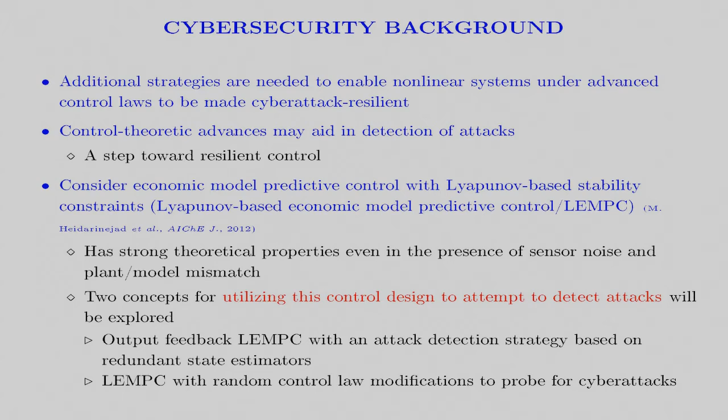We consider a class of input affine nonlinear systems with bounded disturbances and bounded inputs. We consider that the origin of this system is stabilizable, in the sense that there exists an explicit stabilizing control law, h(x), that can render the origin of the system in the absence of disturbances asymptotically stable, in the sense that there exists a Lyapunov function V for which the time derivative along the closed-loop state trajectories under the controller h(x) is negative, for all x in a neighborhood D of the origin. We define a level set of the Lyapunov function in D as the stability region, Omega rho.

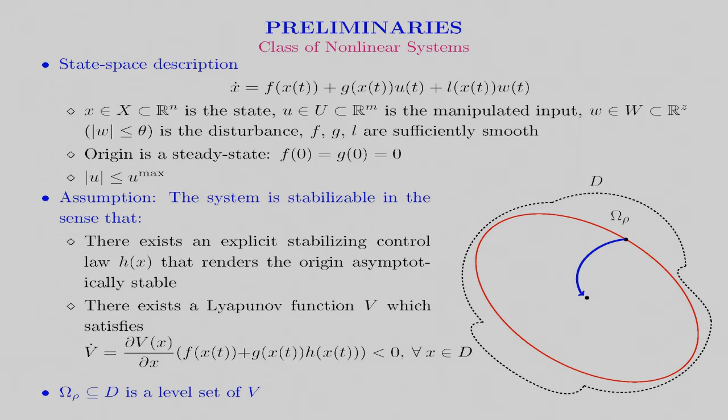We also consider that there are m sets of outputs that are continuously available, and we allow for bounded measurement noise. We assume the existence of a deterministic observer for each of the m sets of measurements, which can be utilized to stabilize the closed-loop state within Omega rho when used for providing state estimates to the controller h(x), and for which the estimation error can be bounded after a time t_bi.

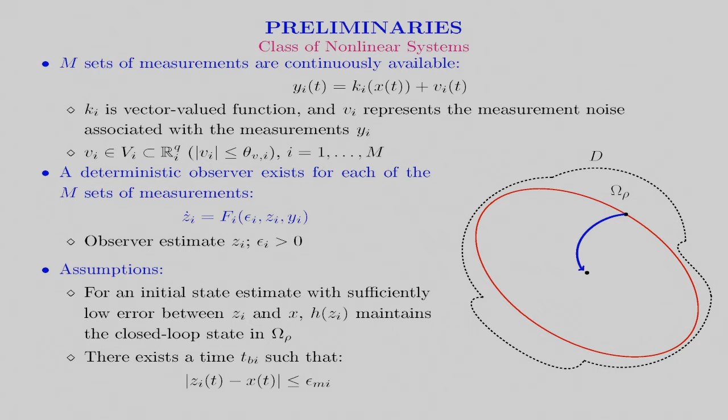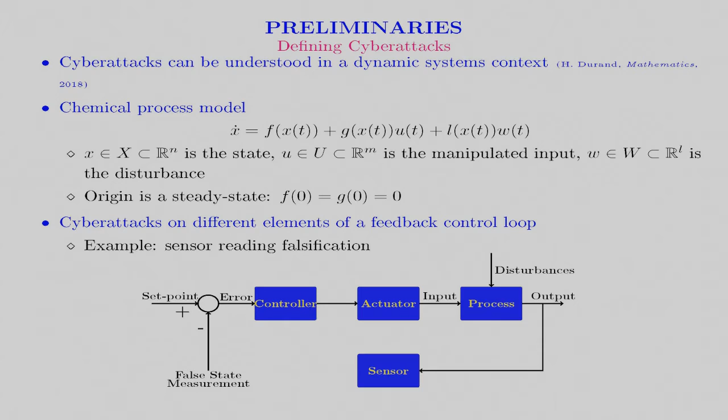Now that we have defined our class of systems, we can use it in defining cyber attacks. Cyber attacks can be understood in a dynamic systems context and can be performed on different elements of a feedback control loop. For example, an attack could break the feedback loop by providing false state measurements to a controller instead of sensor readings. This is the type of attack we will focus on in this talk. False sensor reading cyber attacks prevent true process knowledge from being obtained by the controller. However, it has previously been suggested in the literature that state estimation may help with reconstructing falsified states and detecting attacks.

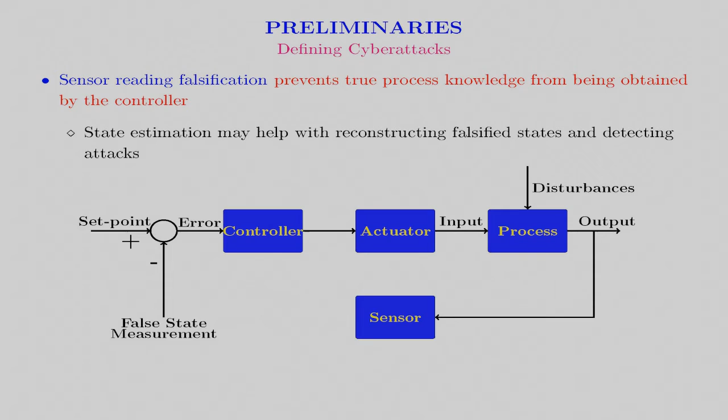A general formulation for output feedback economic model predictive control is shown here. Economic model predictive control, or EMPC, is an optimization-based controller, so it computes control actions by solving an optimization problem, minimizing the time integral of a general and potentially economics-based stage cost L_e, subject to a process dynamic model, state estimate, and input and state constraints. An output feedback EMPC formulation, which our proposed method for cyber attack detection builds on, has been developed with theoretical guarantees in the presence of bounded estimation error and with additional constraints.

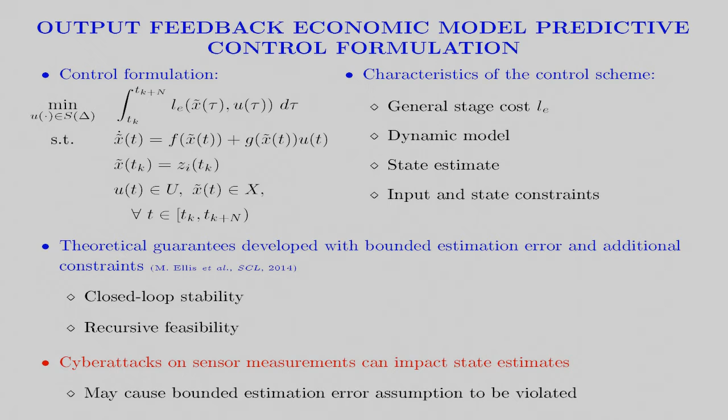However, the bounded estimation error assumption could be disrupted by a cyber attack, so attacks must be detected to prevent closed-loop stability issues. The output feedback EMPC formulation, which our work will build on, is shown here. As noted on the prior slide, this formulation has additional constraints beyond those shown on the prior slide.

These additional constraints are Lyapunov-based stability constraints, and there are two sets of such constraints. The first, shown here in red, are the Mode 1 constraints and correspond to allowing the state predictions in the LEMPC to vary throughout omega rho e,1 while guaranteeing that the closed-loop state stays in omega rho. The stabilizing controller h of x is used in the constraint design and is a feasible solution in sample and hold at every sampling time.

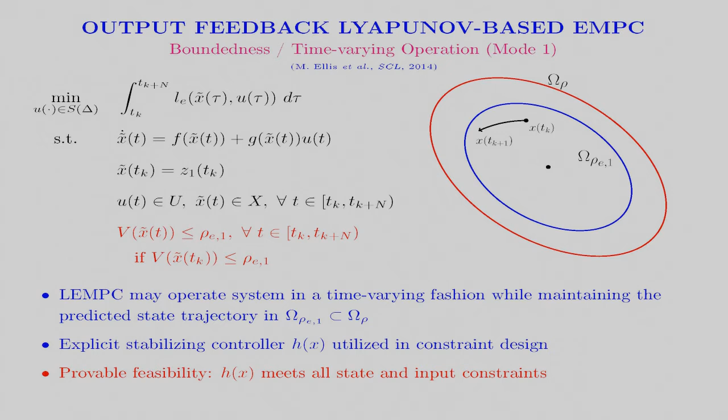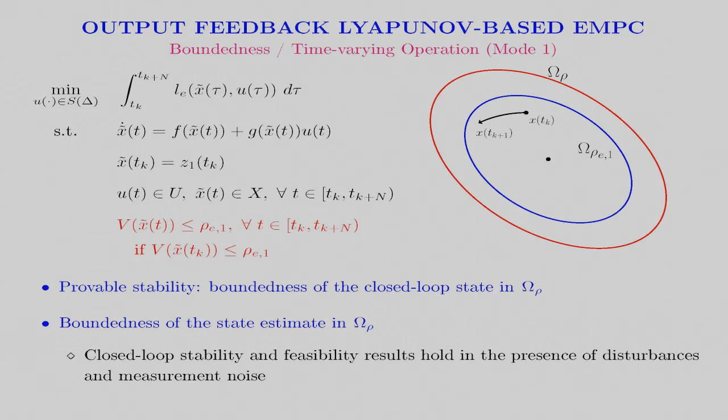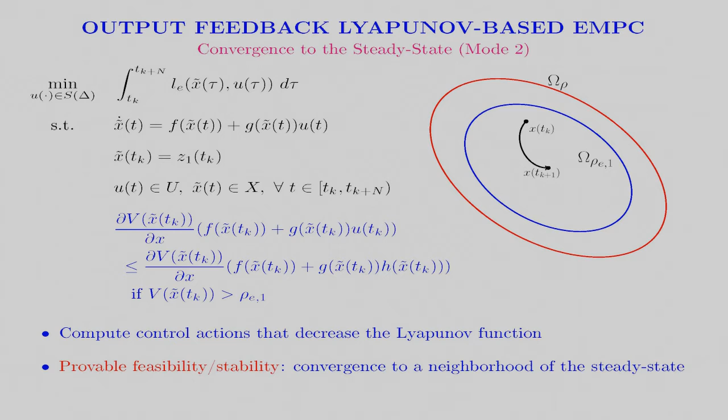This Mode 1 formulation of LEMPC with state estimation-based feedback can keep the closed-loop state and state estimates in omega rho in the presence of bounded disturbances and measurement noise. The second constraint of LEMPC, or the Mode 2 constraint, is shown on this slide in blue. It is a contractive constraint that ensures that the computed control actions decrease the value of the Lyapunov function over the next sampling period. If applied consistently, this constraint could drive the state to a neighborhood of the steady state. This completes the background on LEMPC with output feedback.

Now, we look at how such a control design might be used in cyberattack detection and resilient control. This is the first of the two cyberattack detection concepts to be presented in this work, and is motivated by the fact that the stability results of the prior section rely on the state measurements behaving according to the expected noise profile. If a cyberattack on the measurements occurs, it may not satisfy the expected conditions and has potential to impact closed-loop stability.

However, the properties assumed for the state estimators suggest that redundant estimators could aid in attack detection. Specifically, given the assumption that the state estimate and actual state eventually come within a bound for each estimator, a maximum difference between the estimates from any two estimators can be derived for the case that no attack occurs. This difference can be checked at every sampling time to attempt to flag falsified sensor measurements if it does not hold.

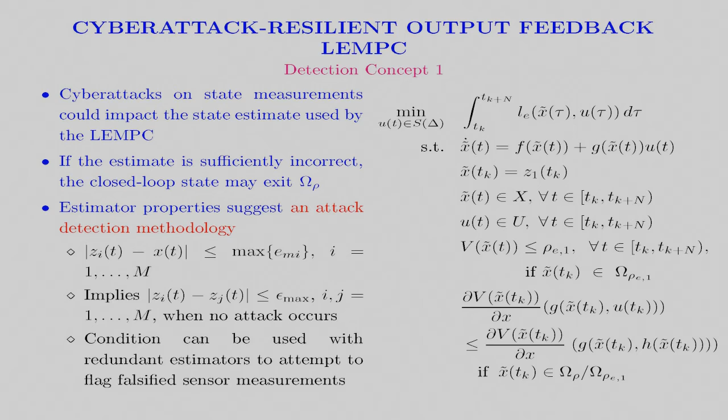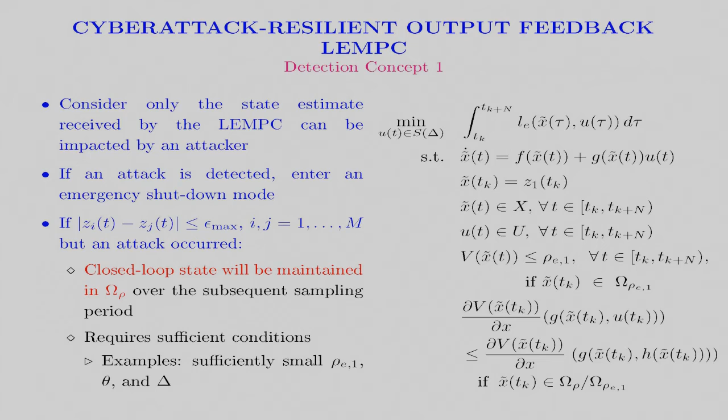In this work, we consider that only the state estimate received by the LEMPC can be impacted by an attacker. Then, at every sampling time, we check the difference between the estimates from all of the estimators. If this difference is within the expected bound, an attack is not flagged. If it is outside the bound, an attack is flagged. Even if an attack has occurred that keeps the difference in the estimates of all estimators within the bound, the closed-loop state will be maintained within omega rho over the next sampling period because essentially the attack is sufficiently small that it is compensated by the design of the LEMPC, as long as the LEMPC is designed to satisfy sufficient conditions such as having a sufficiently small value of rho E1 and of the sampling period.

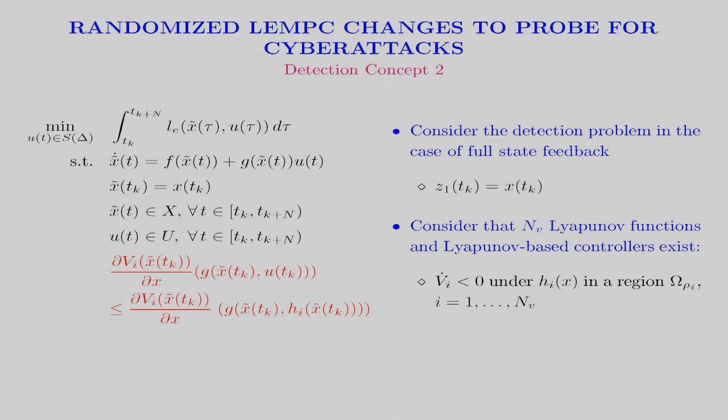We now move on to presenting a second cyberattack detection concept. This concept again makes use of the stability properties of LEMPC in its development, but here we will consider the case of full state feedback, so that where we used to consider estimates in the LEMPC, we now consider a full state measurement. We also will consider that we can develop a number of Lyapunov functions and Lyapunov-based controllers with stability regions in omega rho i, where the time derivative of each of these functions is negative under the Lyapunov-based controllers in these stability regions.

When we design an LEMPC with respect to one of these additional Lyapunov functions and Lyapunov-based controllers with the Mode 2 constraint, shown in red on the left, consistently active, then the value of the Lyapunov function should decrease between two sampling periods after this LEMPC is activated, as long as the closed-loop state is not yet in a neighborhood of the origin around which the controller is designed. This suggests that attacks may be detected by activating these auxiliary LEMPCs with the contractive constraint over time, and then checking whether the activation of the ith controller results in a decrease of V_i over the subsequent sampling period.

To summarize, this methodology works as follows. An LEMPC designed using V1 and H1 is used the majority of the time to operate the process in omega rho 1. At random times, to avoid evasion by an attacker, an ith LEMPC formulation, designed using omega rho I, VI, and HI, is activated for a sampling period, but always with the Mode 2 constraint active.

When this ith LEMPC is activated, VI should decrease over the subsequent sampling period. If it does not, potentially an attack is occurring. We note that this is not guaranteed to locate cyber attacks. Now, we demonstrate this second concept via a chemical process example.

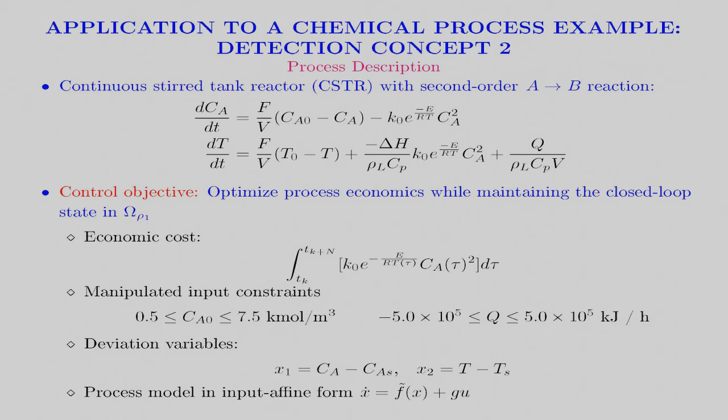We consider a continuous stirred tank reactor, or CSTR, in which a second-order A to B reaction takes place, with the dynamics noted here. The control objective is to optimize the process economics while maintaining the closed-loop state in omega rho 1. The objective function is based on the production rate of the desired product, and manipulated input constraints are used for physical reasons. We can also write this model in an input affine form with the origin at the steady state by defining deviation variables from the steady state.

We then define the Lyapunov-based controller based on that process model to keep the component of the input corresponding to the inlet concentration at its steady state value, while designing the component for the heat rate input according to Sontag's formula. A quadratic Lyapunov function is used with the form shown here. The upper bound rho 1 on V1 in the stability region is 300, with omega rho E1 as a subset of omega rho 1. A prediction horizon of 10 and sampling period of 0.01 hours are also used.

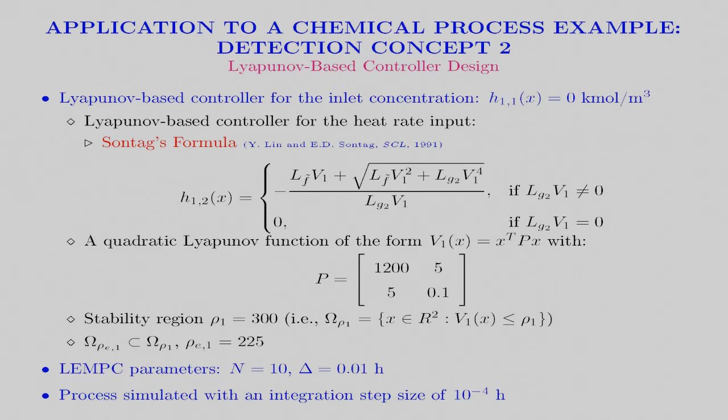To illustrate the second cyberattack detection concept with the nested level sets of the Lyapunov function, we need to define a region omega rho 2 within omega rho 1 that contains the current state. At T0, such a region is found around a new steady state xd, and a new quadratic Lyapunov function V2 is used to define omega rho 2 around this steady state, with rho 2 equals 100 and rho E2 equals 75. This region omega rho 2 is shown in green in the larger region omega rho 1 in the figure noted.

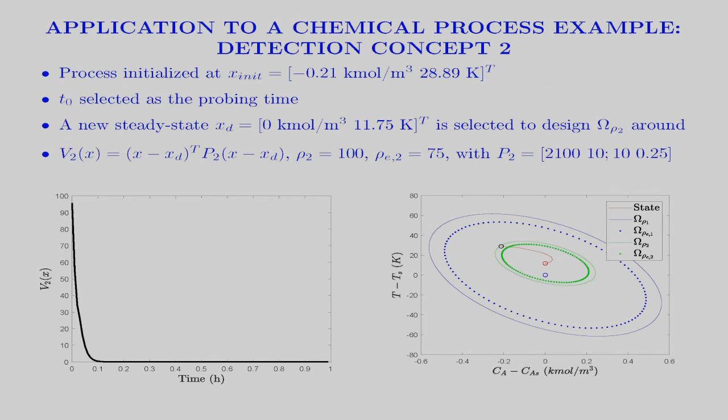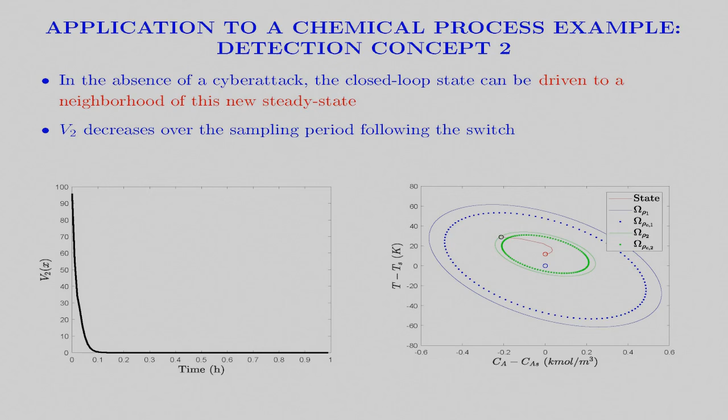When this new stability region is used to define a new LEMPC, starting at T0 with the mode 2 constraint activated at all times, then in the absence of a cyber attack, the closed-loop state can be driven to a neighborhood of this new steady state if that new LEMPC continues to be applied. In addition, we see that V2 decreases over the sampling period following the switch, as reflected in this figure.

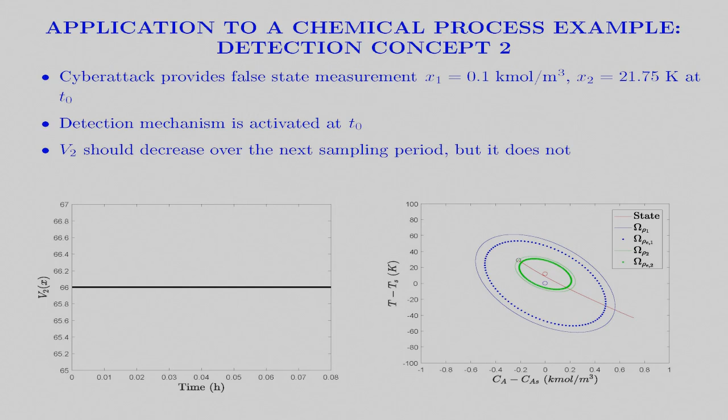However, when a cyber attack occurs that provides a false state measurement starting at T0, the same time as the probing starts by activating the LEMPC defined with respect to omega rho 2, then though V2 should decrease in the sampling period following the activation of this new LEMPC, it does not, signifying a potential attack condition.

In conclusion, detection mechanisms using LEMPC may take advantage of control theoretic guarantees in detecting cyber attacks on sensor measurements. We looked at two different concepts for this in this talk. One was a cyber attack resilient output feedback LEMPC that combined state estimation, detection, and control. It assumed that multiple state estimators were available for the process and that the one used by the LEMPC could be compromised by a false sensor measurement attack.

However, through a strategy that looked at comparisons between different estimates from different estimators, it was determined that the resulting framework allowed for either an attack to be detected or for the closed-loop state to be maintained within a well-characterized region of operation. The second detection mechanism we looked at explored randomized changes to the LEMPC formulation to probe for attacks. This included randomly modifying the control law in a way that should create a specific outcome if no attack is occurring. There is no guarantee, however, that this detects an attack.